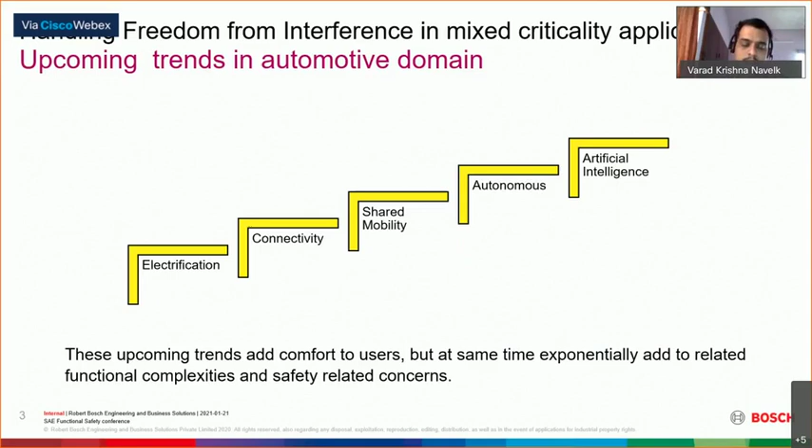Finally, we would also look at some solutions to implement freedom from interference in such systems. The trends we see in coming years are electrification, connectivity, shared mobility, autonomous driving, and of course artificial intelligence. All these functionalities will bring a lot of complexity, and what I'd like to focus on is that all these functionalities would need a lot of processing power.

That brings me to the next topic: how our architecture or an ECU would look like. Unlike our conventional systems which have only a single microcontroller, for the systems we are speaking about currently, we would have SoCs—that means a lot of system on chips.

SoC, system on chip, would have a lot of CPUs, maybe up to 8 to 10 CPUs, and then we would have these GPUs and the DLAs, that is the graphical processing units and deep learning accelerators.

So why do we need these? For example, for autonomous driving we would need perception algorithms, and these perception algorithms would need a lot of deep neural networks. And to implement these deep neural networks, we would have the processing power supported by GPUs, which would support parallel computing.

This GPU could have up to 512 cores in it. And if there are any complex operations needed, such as convolution, these can be offloaded from the CPU, and then the GPU could do a lot of such parallel computations. That means there are a lot of parallel multiplications and additions these 512 cores are going to process, and then they return it to the main CPU.

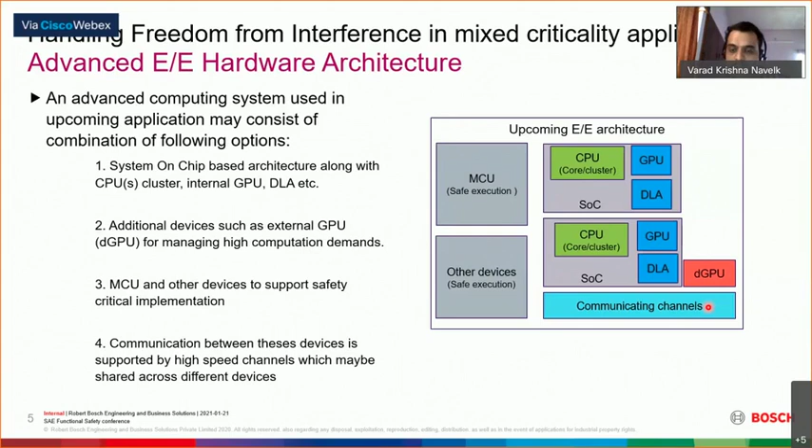So this is the architecture that we are looking forward for the new generation ECUs. And with this, I move to the software architecture, a brief software architecture.

It would support a lot of virtualization, wherein you can have virtualization of operating systems or virtualization of various software components. So there could be more than one operating system which runs on top of the hypervisor. That is the trend that we see.

And the operating systems for the processor world would be based on POSIX. An example is QNX from BlackBerry. So these are all the new generation topics that we see. And on top of this, we have the adaptive AUTOSAR for the microprocessor world.

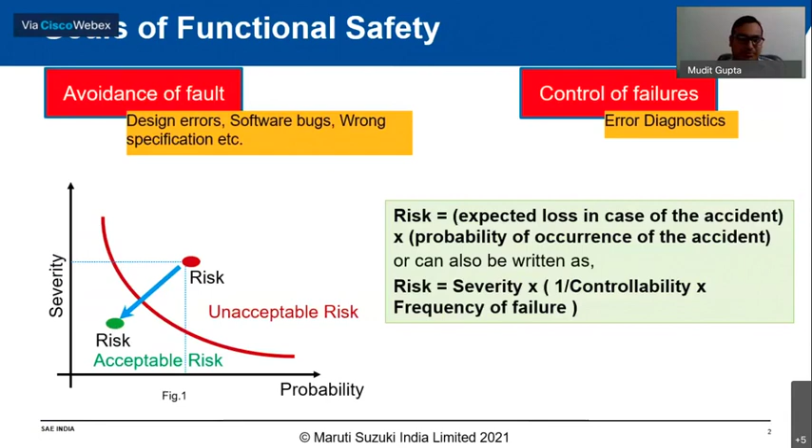Moving further, what is actually risk when we come to software design and development? As per Part 6 of ISO 26262, there are various stages and concepts through which we define the risk and how we control those things.

If we look into the specification part 6, the part we are most concerned about is the specification of software safety requirements, which deals with software development being suitable, compliant to the technical safety requirements, and consistent with the hardware-software interface.

Taking a deeper dive into this aspect, the suitability of software development requirements is defined as follows: when software is developed, requirements should be unambiguous, comprehensible, and atomic in nature. They should be implementation-free, meaning not platform specific, and they should be verifiable, conforming to standards. They should also be feasible and achievable.

Requirements should be complete in itself. Only the necessary requirements should be part of the actual development, and it should be internally consistent. So these are the requirements, but in today's paper we are going to see how we achieve more into the feasibility, completeness, necessity, and consistency aspects.

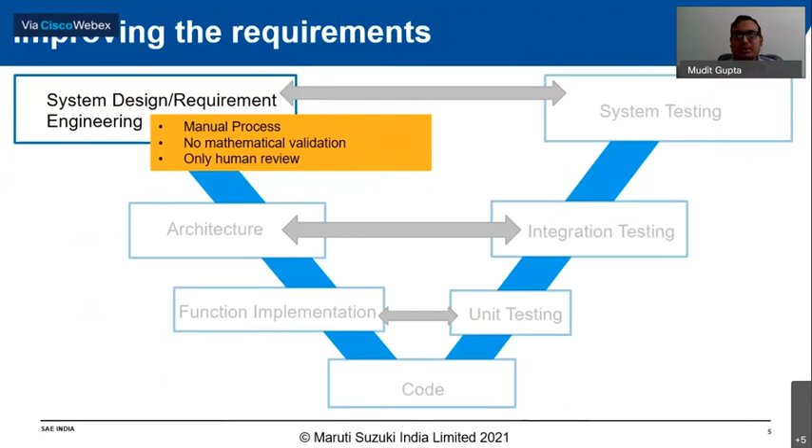Looking into the classical way of designing requirements, it's basically a manual process of defining logical requirements. There's no mathematical validation as of now, only a manual review done to improve the requirements. This may not be sufficient to catch all the impacts or defects that could lead to further failure of the software or an increased risk level.

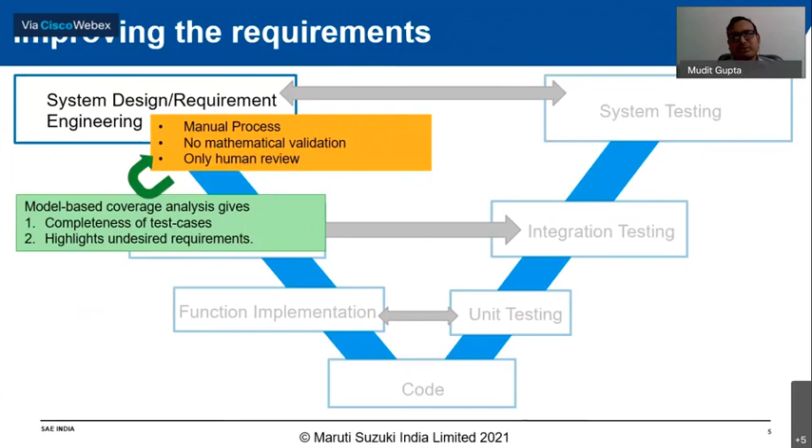Now, when we talk about model coverage, it basically deals with the completeness of the test cases required to check the developed software, and it highlights the undesired requirement.

So how do we actually do that? If we look at the basic types of model coverage, there are four types. One is execution coverage, which determines whether an item is executed during simulation or not. The decision coverage determines the percentage of the total number of simulation paths covered by the decision paths.

The conditional coverage requires all the inputs to the logical blocks to be true and false at least once during the completion of the simulation. And the modified condition decision coverage defines the coverage checks for the independent effect of an input on the outputs.

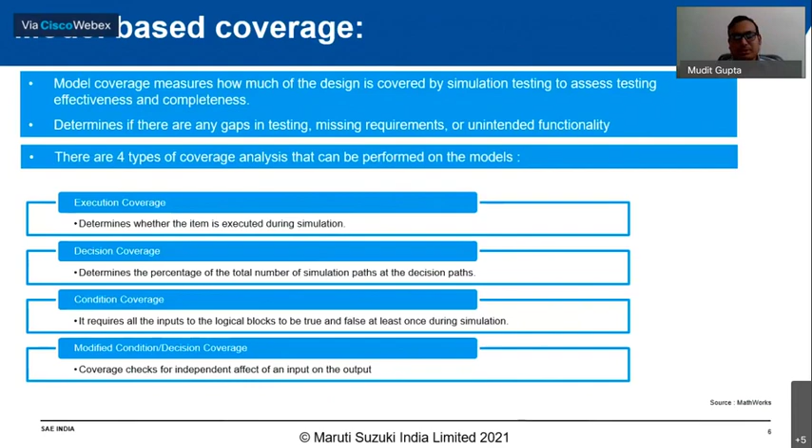Taking an example, consider a scenario where a requirement is defined in two clauses, where the output would be true if both clauses are true, or at least either of the clauses is true. Clause 1 determines, for example, that the output would be true if any of the car doors goes from closed to open. Clause 2 determines that if any door is open and any other door goes from closed to open.

If we take just clause 1, we can define the system by taking the input from all the doors, their previous state and current state, to determine whether it has gone from closed to open. If those outputs are true, then the final output is also true.

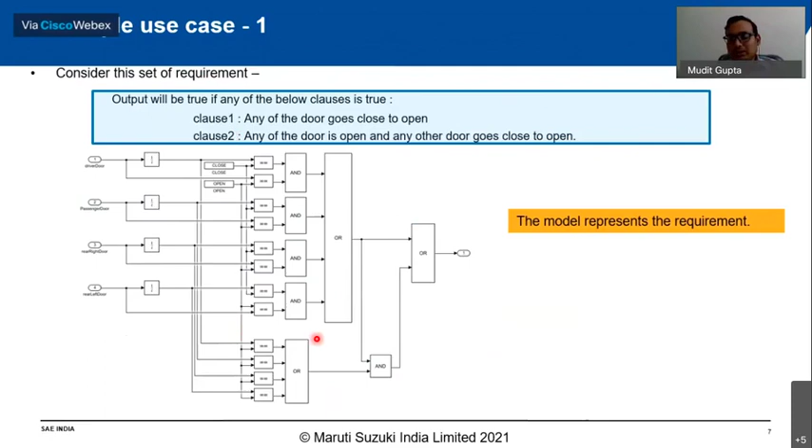Coming to clause 2, which is basically if any door is open—the lower part of this system—and any other door goes from closed to open, this system takes the input from the previous clause. So this model represents this particular requirement.

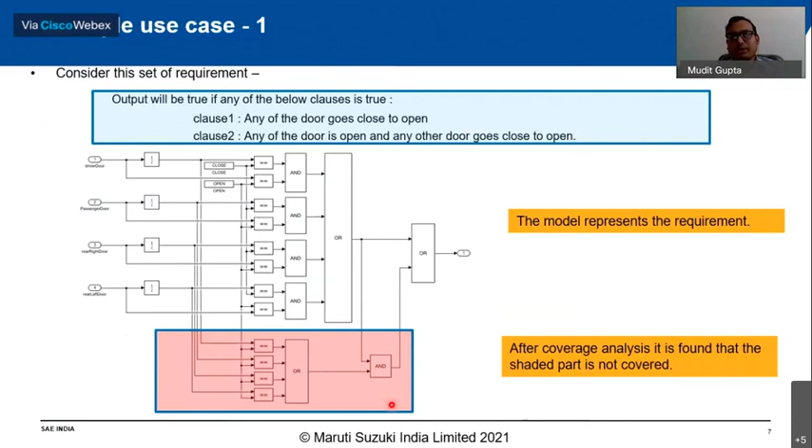But if we look closely and do the coverage analysis, we find that the shaded area, the lower part which is one part of clause 2, is not even being covered. So even if it is not implemented, it will not lead to any kind of fault in the logic. So why is that?

To understand that, let's break down our clause into further conditions. Let's say clause 1 is condition 1, and clause 2 is broken into two sub-conditions. The first condition is that any door goes from closed to open. The second condition, the first sub-condition of clause 2, is that any door is open. Condition 3, the second sub-condition of clause 2, is that any other door goes from closed to open. If we look closely, condition 1 and condition 3 are quite similar.

So the output is condition 1, or the AND of condition 2 and condition 3.

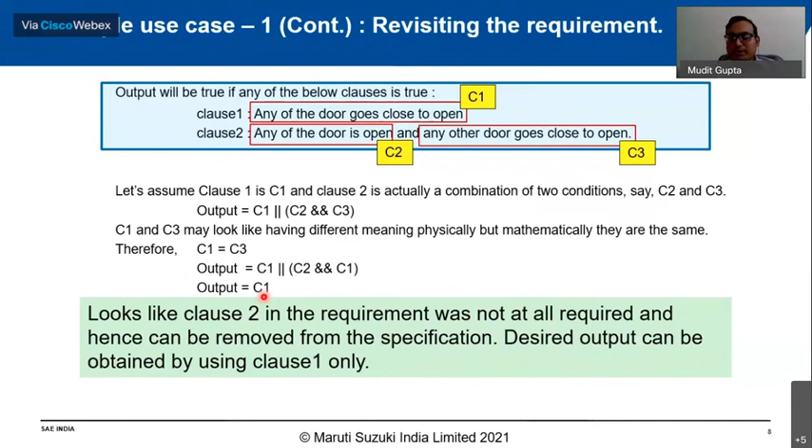So if we replace condition 3 by condition 1, since both are similar, we find that the output is directly linked to condition 1. There's no dependency on clause 2, so it looks like clause 2 is not required at all. It can be removed, and the desired output can be obtained by using clause 1 only.

Moving on to the next example, we take another scenario in which a state variable can assume two states, say state A and state B. When the state variable is in state A, the output is the following pulse: a ramp up happens for a certain duration, then it reaches 100% capacity for a certain duration, and then a ramp down happens.

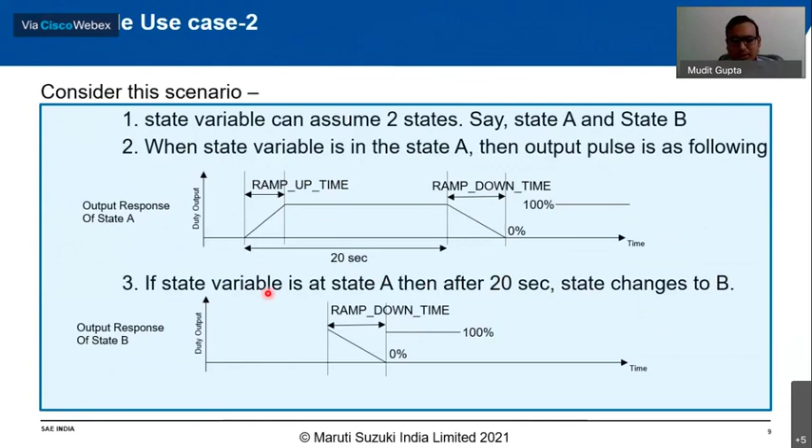Going to the next clause of the requirement: if the state variable is at state A, then after 20 seconds, the state changes to B. So if we try to implement first the first condition and then the second condition, here's what happens in this scenario.

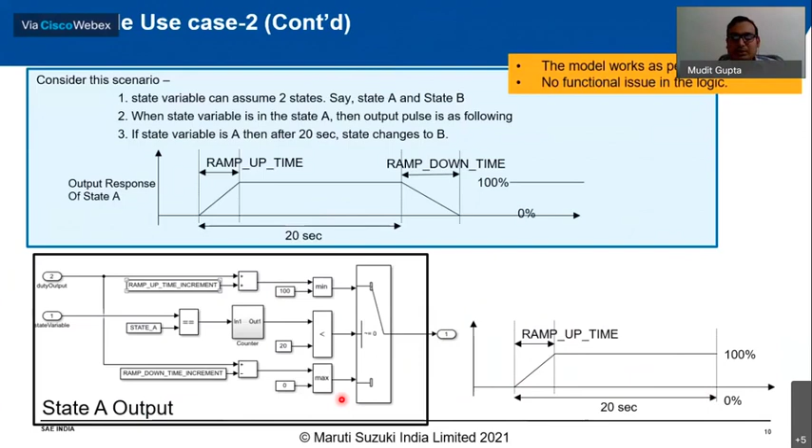Using this model coverage, we can determine that only if the first part, state A, is implemented, then the ramp up will happen, and within 20 seconds, the ramp up happens and the 100% part is achieved, all within the first 20 seconds itself. The model works quite fluently with this logic.

But if you see the part where the ramp down is required, that does not execute at all, because we have covered our system within the first 20 seconds itself. So the ramp down is not taken care of by the system.

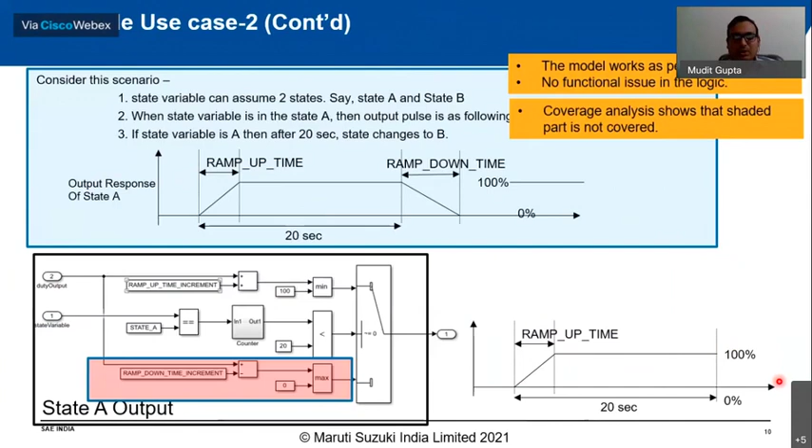What happens is we then come to the next state where it says the ramp down also has to happen, which is defined by the state when it changes to state B. This again is to be taken care of by the state B variable. So the first part where the ramp down is to be taken care of in state A is not executed at all. This is found through model coverage, that if we do not have this particular requirement in state A, and rather it is only contained in state B, that would also suffice the requirement.

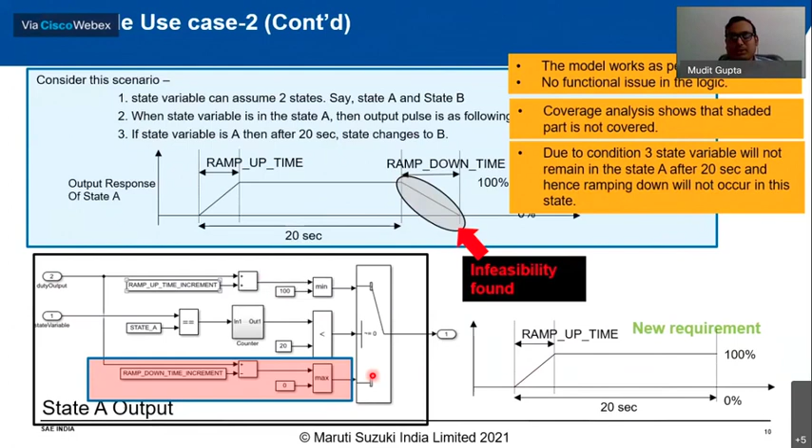So what does this summarize? It leads to using model coverage analysis, we are able to improve the requirements to gain few of the characteristics described in ISO 26262, part 6 and part 8. If we see the examples, the model now becomes more feasible with the requirements becoming more achievable. The requirements are more complete, containing only the necessary requirements, and those are internally consistent.

So this improves the requirements through this approach, and it can front-load finding infeasible and redundant requirements quite early in the development cycle.

So basically, once the requirements are defined, a model is created to find whether those requirements are being covered completely using all the model coverage approaches. If any of the model coverage approaches lead to some ambiguous, incomplete, or unnecessary requirement, then those can be taken as feedback to the requirement itself to improve it.

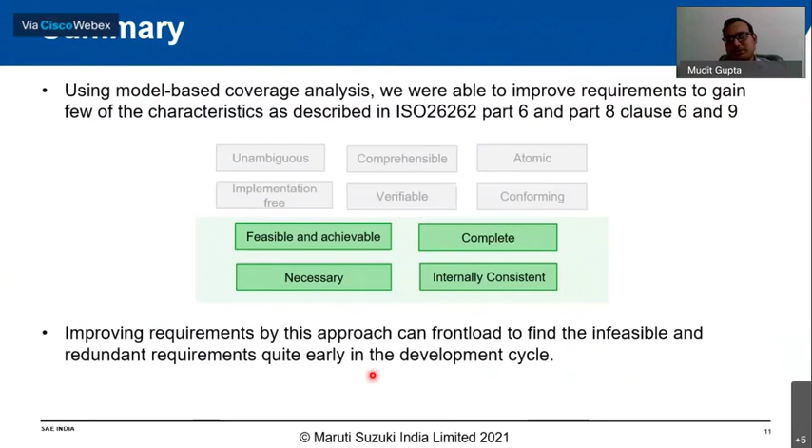And this is how it would lead to catching any kind of infeasible or unnecessary requirements much earlier in the development cycle. So this is all from our side, and please let us know if there is any question.

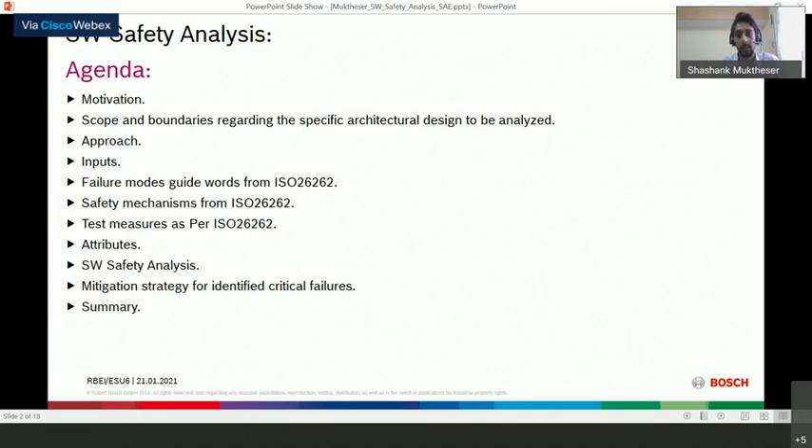And finally, the last part would be - having done software safety analysis is only one half of the thing. The second half is the mitigation strategy: how do we mitigate whatever failures, whatever negative effects of software we have found through this analysis? That is another thing. So let's jump straight into the first part - what is the motivation?

So let's just begin with asking ourselves a question. What is software safety analysis?

In very simple words, it's an analysis done at the software architectural level. So we have from HARA, we get requirements at the vehicle level. The OEM, for us Bosch at least, gives us customer requirements. Then we do a system packaging where we have system safety requirements, then we further allocate hardware safety requirements and software safety requirements and so on. So software safety analysis is an analysis that is done at the architectural level of the software.

So why is it necessary? The first thing is software is there in every safety critical system, and it is expected to behave with certain functions and behaviors, and it is designed, developed, implemented, tested and validated. Despite going through all of this stringent process, according to ISO 26262, it is still possible to have an analysis process to find out whether there can be any design weaknesses or design failures, and those design failures and faults could be mitigated using certain mitigation strategy. So the first motivation is we find out what sort of failures are possible within the design of our software. The second part of the motivation is mitigation.

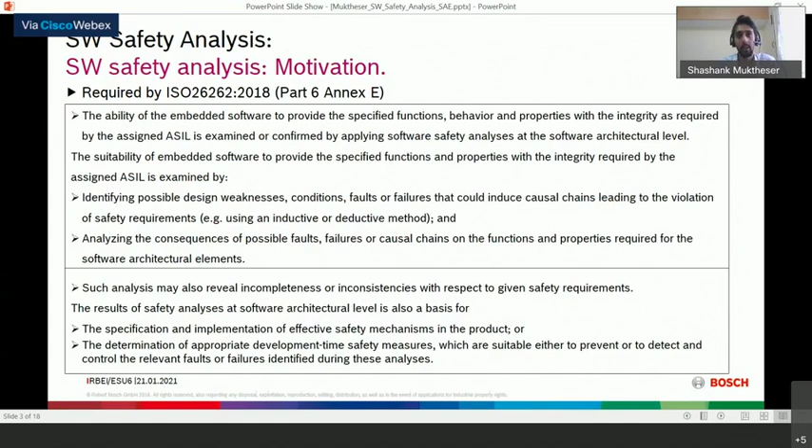So the next thing would be, once we know the motivation, we basically know where we begin and where we want to end up. And the second part is we have to define a certain scope.

Varad and Abhay were already talking about different sorts of ASIL in the software, for example mixed ASIL, and there was also a question on max ASIL. So if my software is all of same ASIL, do I need FFI? What I would say is, if your software is all of same ASIL, which is a max ASIL design, that means all the requirements and the architecture is designed, developed, and tested with that maximum ASIL. In that case, what you really need is a software safety analysis, because that way you will be able to find out what sort of failures could possibly happen and how you can mitigate that.

So in very simple words, the scope and boundaries of a software safety analysis is at the architecture level. Every component which has got ASIL in it, we are supposed to take into consideration for software safety analysis. So this is the first part - we talked about motivation, and what is the scope and boundaries of the software safety analysis.

Now comes the approach. When it comes to approach, there are so many guidelines from ISO 26262, and they say it could be a software FMEA kind of thing, or software FTA kind of thing. It could be an inductive process or deductive process. So basically there is freedom on how you want to do your approach, but the whole thought of designing an approach for software safety analysis is very simple. You know where you're starting - you have some software architecture or software safety requirements, and you find out faults. That's where you start. And where you end up is another important thing - what you get out of this software safety analysis, and how you can make value addition to your software safety concept.

Just to give what guidelines ISO 26262 gives us - you start either with your software architecture design, or you can start with your software safety requirements. From that, if you can find out what sort of failure is possible to happen, it is also possible to refine and improve. So this analysis is where you can find out what could possibly go wrong, or what is the negative effect, and so on. If you find out all of that, it is also possible to refine and improve the software safety requirements. In this way, we've taken our existing software safety concept, and we also make value additions to the software safety concept itself. So it's a circle of process.

So we just saw what sort of guidelines we have from ISO 26262. Now how are we going to translate that into actual software safety analysis?

As I already mentioned, we have system safety requirements, then we allocate hardware safety requirements, and we allocate software safety requirements. Once the software safety concept is done and we specify software safety requirements, we take each and every requirement and identify what sort of failure is possible in it, whether it's an input failure or a processing failure. So imagine in a simple way: there's a software, input can come in, and taking that input, the software processes something and the output comes out.

So there could be two kinds of failures: the input signals to the software can be wrong, leading to a negative effect on the output, or something within the processing might go wrong, leading to a negative effect on the software. So for each software safety requirement, you identify whether an input is causing the problem or processing is causing the problem.

So then you start giving failure modes to this input signal or the processing of the requirement. If you take an input signal, there's already guidance from ISO 26262 — a table in Part 6, Annex E, which says what sort of potential failures can happen when it comes to input signals. I'll talk about it in detail a little later, but you can start giving failure modes to your input signals or your processing.

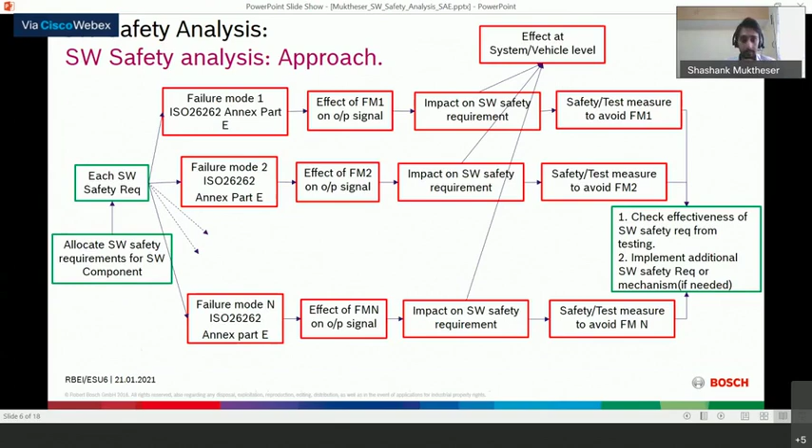Okay, so now we just talked about the approach. So how are we going to translate this into some sort of tool-wise? You can simply put it into an Excel sheet where you start with your software safety requirements, then identify your input signal and its description, then get your failure modes and failure descriptions from Part 6, Annex E, Table E.1. Then you connect them, tracing to effects at the system or vehicle level, and the negative effect at the software level.

You can also use the software safety analysis as a document of evidence showing what has already been done for software safety. For example, if you've already implemented certain safety mechanisms for certain requirements, you can mention what mechanism is there and whether it is adequate or not.

The next part is to define a safe direction or error reaction. Since you've already defined some failures, if the failure happens, what should the safe behavior or error reaction be? Based on this, you define test measures for every failure mode so the output of testing is in terms of safe direction or error reaction. If this is not adequate, it becomes clear that the current requirements and safety mechanisms are not sufficient, so we'll need to implement additional safety mechanisms or requirements. This way, we add value to the safety concept.

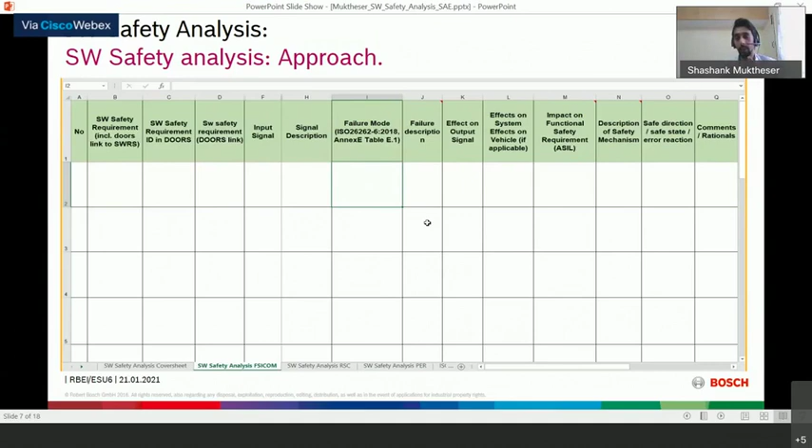So once you know the motivation and the approach, you're going to start doing a software safety analysis. What are the inputs you require? The starting point is the software safety requirements. You should have your technical safety concept derived and software safety requirements specified, and your software architecture developed.

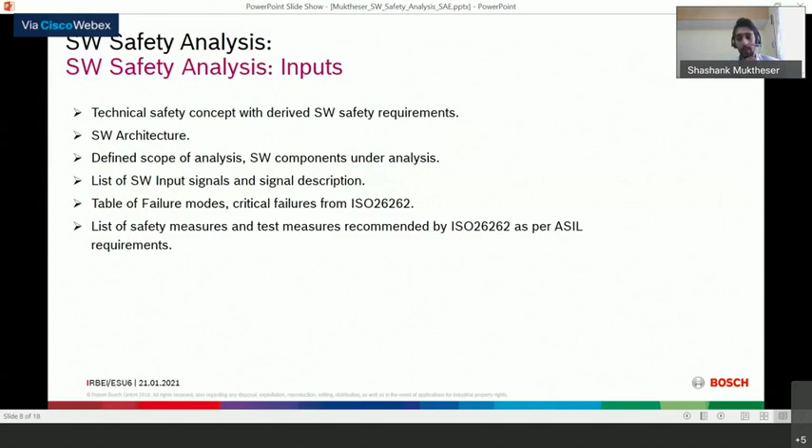As I mentioned, the scope of the analysis, what components fall under analysis, has to be defined. Then the list of input signals and their descriptions is a good starting point. And definitely, we take inspiration from ISO 26262 in terms of failure modes, critical failures, and safety measures and test measures recommended as per the ASIL requirements. These are all the inputs needed for software safety analysis.

Going slightly deeper, I already touched upon failure modes in the approach discussion. From ISO 26262 we get a table mentioning what sort of failures are possible. How could ISO 26262 come up with this? Since all software errors are due to systematic error, they could theoretically come up with what sort of failures are possible in software.

At the signal level, it is possible that there could be a late signal, a too-early signal, or no signal at all. The deeper causes for all of this are also mentioned within the table—it could be delay of information, incorrect sequence, blocking, live locks, deadlocks—and Abhay and Bharat have already touched upon these topics earlier as well.

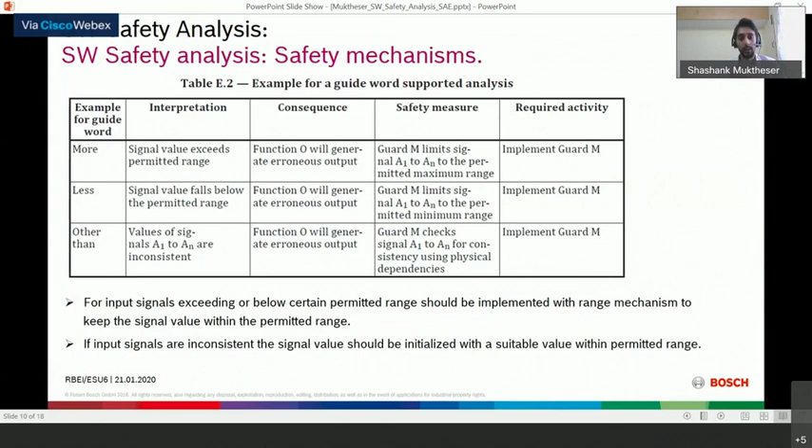According to ISO 26262, it's also possible that every time there are requirements related to a certain range within which the software process has to happen. For example, the requirement might say a certain value should be kept between 0 and minus 3.5 meters per second squared. There could be potential failures where it exceeds the upper limit or goes lower than the lower limit, and the values could become inconsistent within the software. ISO 26262 gives guidelines on how such failures can be taken into consideration and how they could be mitigated.

The next inspiration we can take from ISO 26262 is regarding the availability of different safety mechanisms at the software level. We have different error detection and error handling safety mechanisms for different ASIL levels. The table describes what ASIL level is recommended to have what sort of error handling and error detection methods and mechanisms.

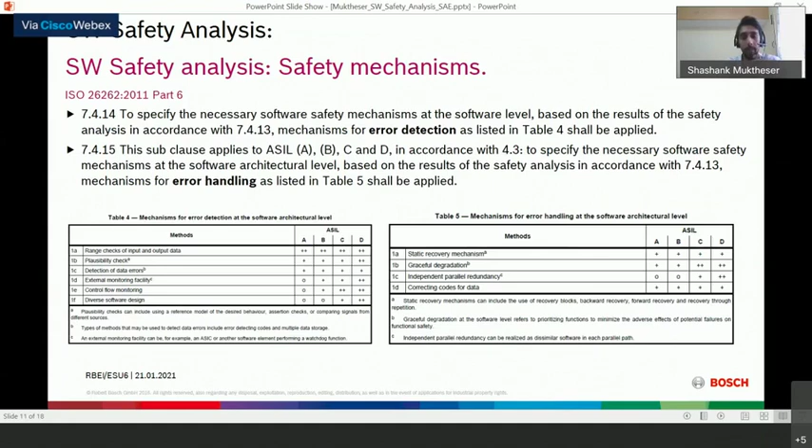This is a slide I just added to give a brief description of each safety mechanism. For example, we have certain error detection mechanisms like range checks, as I mentioned about failure, where the failure could be over the upper limit or under the lower limit. ISO 26262 recommends having a range check for both input and output data, and this is recommended for all ASIL levels, A, B, C, D.

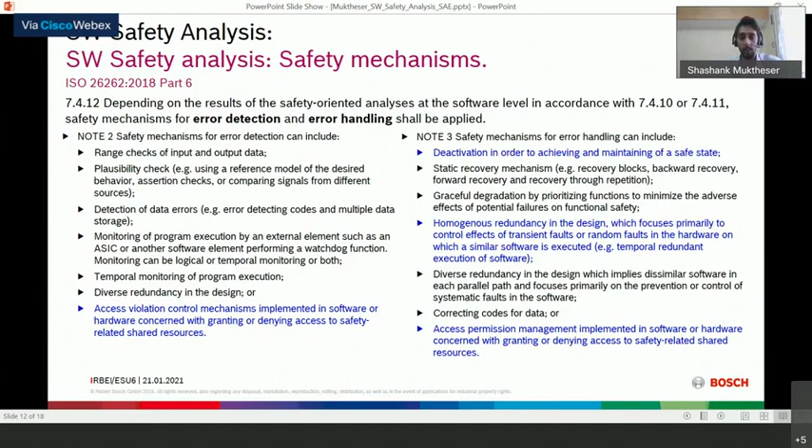Based on all of this information, we can determine what sort of failure is possible, what safety mechanisms are available, and what is recommended for the various ASIL levels. This will be a good input for us going into software safety analysis.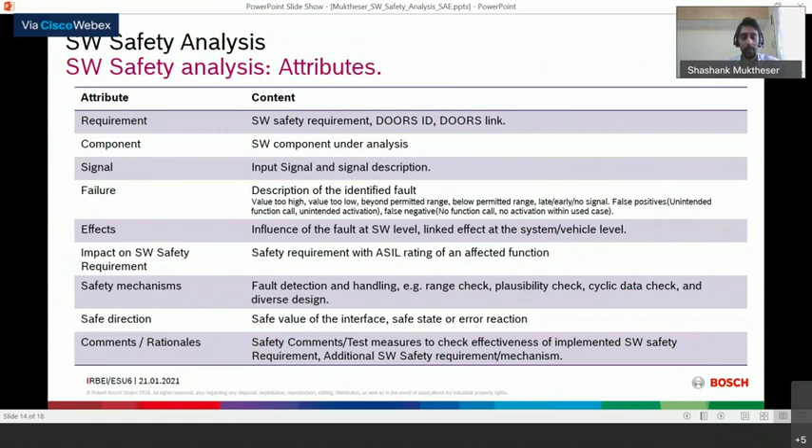Now let's get into a practical example of taking a requirement and doing a software safety analysis, from where we start to where we end up, and how we make valuable input to our software safety concept. So let's take an example here. This is a requirement which is just made up.

Let's say there is a limiter in activation. This is a requirement coming from a radar point of view, regarding AEB brake deceleration. Let's say there's a limiter in activation, and it says basically take a certain value from a certain ECU. This means a certain input signal must be taken from one part to another into your software. So in the requirement, it talks about the AEB brake deceleration request signal - that's what's supposed to happen. Your software has to retrieve a certain input signal from a different ECU.

So what sort of failure is possible within this small feature in your software? From the failure mode guide words, it's possible there could be no signal retrieval at all. It's also possible there could be too late retrieval, or too early retrieval, which affects data corruption or false positivity of your function's actuation. Those are the three failure modes possible during this feature.

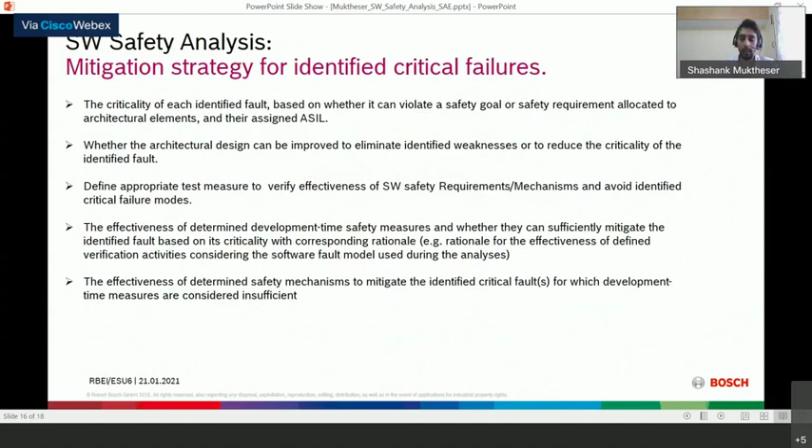So the last thing would be the summary. This is pretty much all I've talked about until now: identification of failure modes, identifying what sort of effect on the output is possible, and linking that to a software safety concept, then system safety concept, then the safety goals. The second part is to have a mitigation strategy in terms of test measures and software safety mechanisms and measures, and how you can define them.

The last thing I'd like to say is that all of this is a theoretical way of defining an approach and doing analysis. But what is the next step to this software safety analysis? All of this is a qualitative analysis right now. If it's possible to come up with a quantification of this entire process, that would be much more of a value addition. That would be the scope for further work, and if it's possible to automate it, that's also another scope for further work.

So with that being said, I hope I've explained all the three things I started out with before I began talking. If there are any questions, I'd like to take them now. Thank you so much for your attention until now.

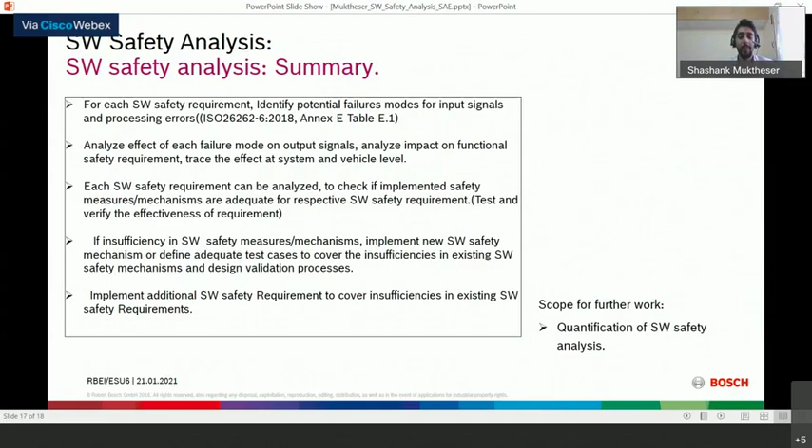Yes, it was really a wonderful session, and there must be many learnings for the participants and audience.

So now we are getting questions. One question is from Manohar, from slide 6. If you can see the question in the right green box: is it a check for effectiveness of requirement or safety mechanism?

It could be both. For example, as I already mentioned, you have to write test measures for the failure mode, then you give the failure mode to whether it's the input signal or the requirement. So if you give the failure modes to this input signal or the requirement, then it depends. It could be for both requirement or the safety mechanism itself. Mostly, since we're giving all the test measures and failure modes to the requirement, it would be directly to the requirement. In this way, we can find out what sort of insufficiency is there within the safety requirement we've been specifying, and we'll be able to find out if something else is necessary.